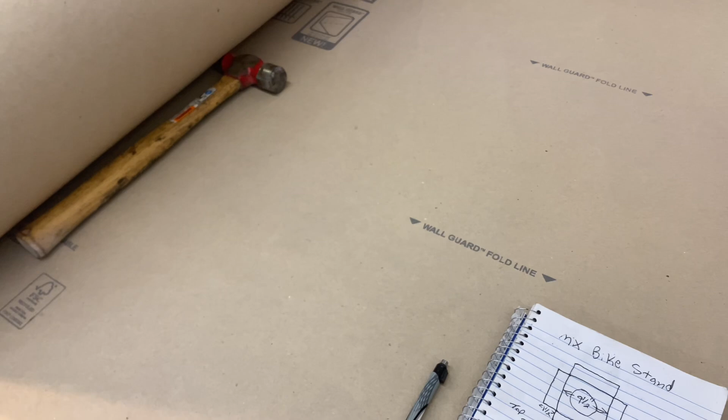All right, let's get started on this thing. First off, I like to make patterns of everything that I make. The pattern board I use, I get it at Lowe's, big box stores. It's some kind of underlayment, something used for walls. But it's like the perfect thickness to use for patterns for everything that I make here.

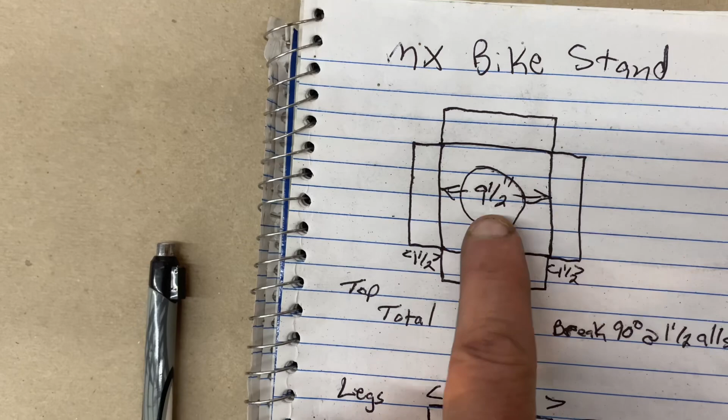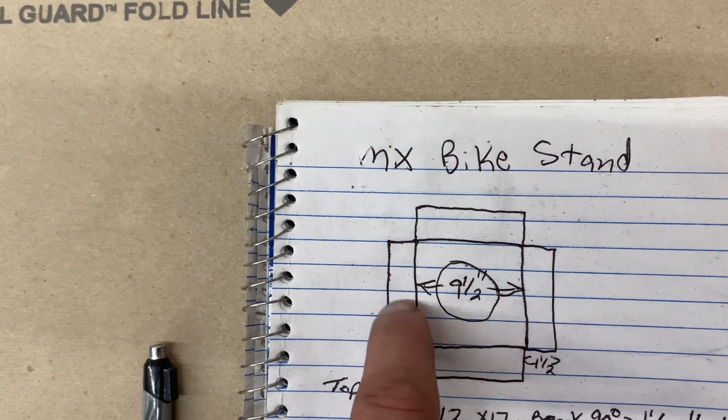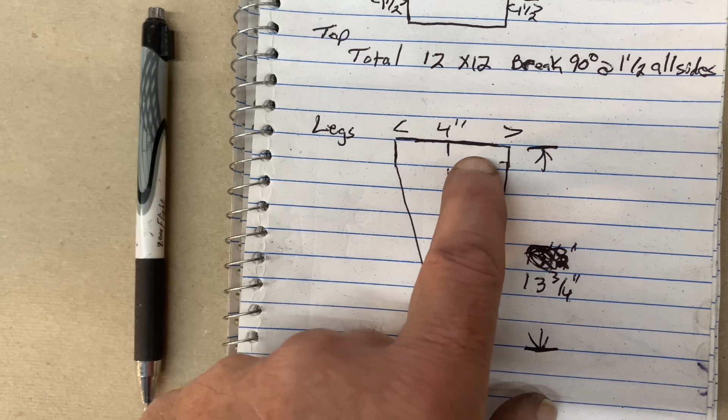So first off, here's what I'm going to have. This is going to be the top of my stand. It's going to be a total of 12 inches square, but I'm going to add 1.5 inches on all four sides right here, and I'm going to break them down 90 degrees. Then what I'll do is these will be the legs. I'll make 4 of those. It'll have a bend in the middle, a break in the middle. And those are right in here is what's going to weld to these right here out at an angle.

So let's get a pattern made for this and see what we can do with it. I also wanted to add, the reason I make patterns for everything is, number one, if you mess up a paper pattern, you can always throw it away. You don't have to throw away any good aluminum, so you can just start over the paper pattern. Number two, if I make a second one, I'll have the patterns there. I won't even need to break out my tape measure or anything. So that's why I use the paper patterns all the time for everything.

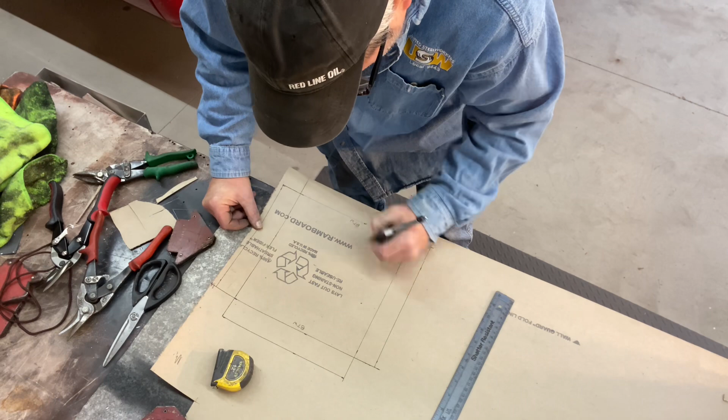Okay, there's our pattern drawn out. So I'll go ahead and cut it all out, and then I will break these 90 degrees. You'll notice I put BTW right here, that's just my code of me knowing what to do. That means break this way. Okay, all of them needs to be broke this way.

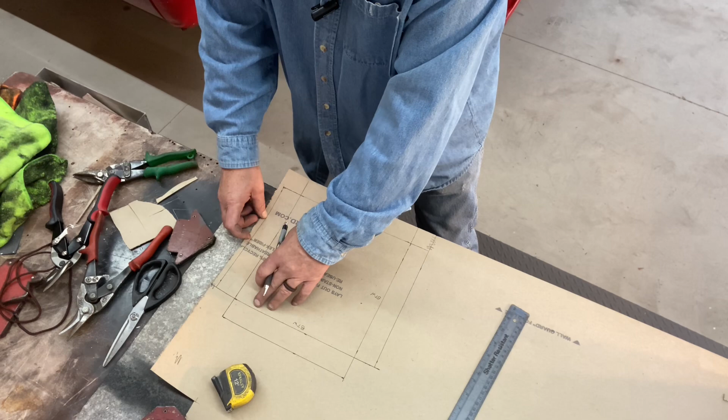Now there are some instances where I'll have a pattern where when I lay it out, I'll have one that's break this way, and I'll have another that maybe breaks the other way. So on those, I will put BOW, break other way. That's just a code for me to know what I need to do. People use different ways of doing it, but I'm going to get this cut out now and put it in the sheet metal brake and get these broke up and go from there.

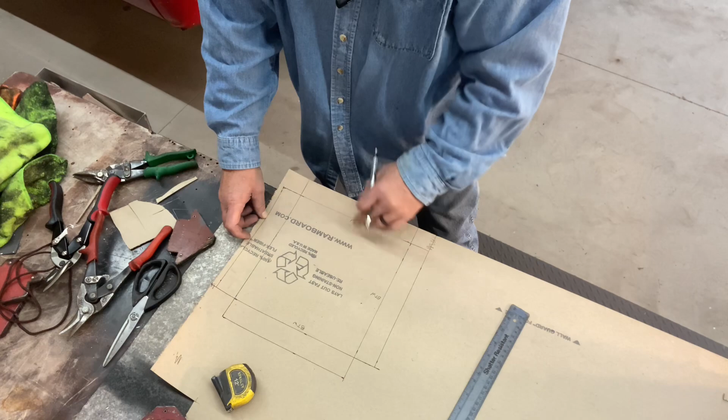All right, we're going to go ahead and make our pattern for the legs, which I'll only have to make one pattern, and that's it, because it'll be used for all 4 legs, so it'll be good. So let's go ahead and draw that one out.

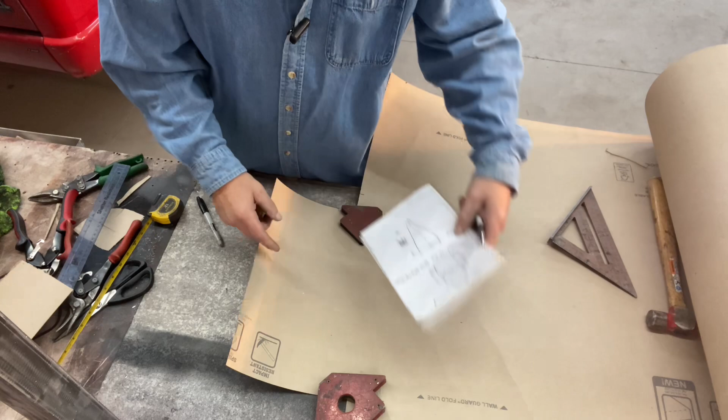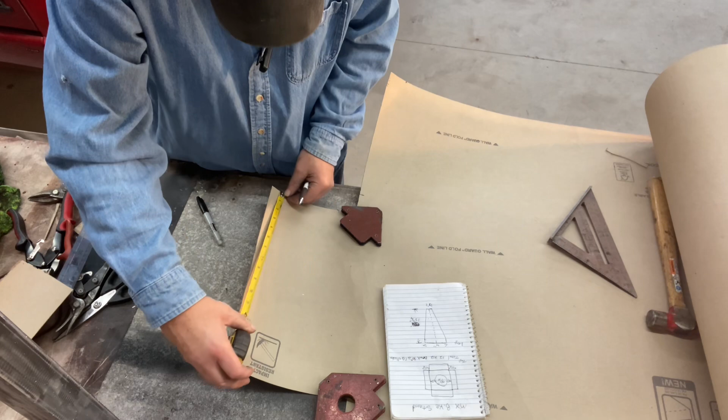Let's see, I was going to make them 4 inches at the top. It'll have a break in the middle at 2 inches, and then the bottom will be tapered. It'll be 3 inches, so these will taper down to it. So we're 13 3/4 total. I'm going to go ahead and mark 13 3/4 and strike a line. Let's make a line all the way across on that. There we go, so we'll just measure over 4 inches. Actually, I'm going to make a mark at 2 inches also.

Okay, then what I'll do, I've already squared this line up. I'll make a mark at 2 inches right there. Okay, and since this is going to be narrow, this is 4 inches. Okay, this is going to be 3 inches at the bottom. That's why I made my 2 inch mark at the bottom also, because I'll need to come out half of 3 inches from my 2 inch line. So 1.5 inches plus 1.5 inches would be 3. So we'll come out 1.5 inches here, and 1.5 inches on the other side.

Now what I'll do is I'll strike a line from my 4 inch mark to this mark, and then from my corner right here to this mark. And that's where I cut it out. My 2 inch line here will be the one that I will have my break, where I will break it. So let me get those marked out, cut out, and then we'll have both our patterns made.

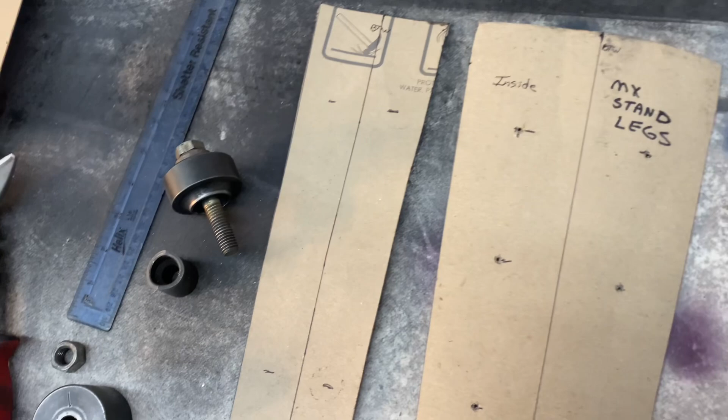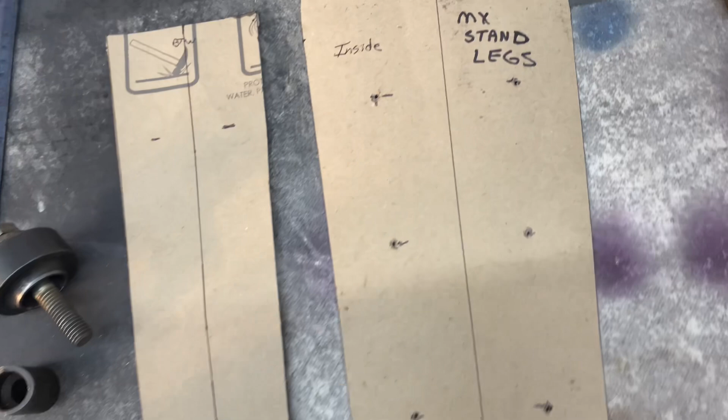All right, I had to change something up a little bit on the legs. As you can see, here's my original that I made right here. I had to make it wider. I'll tell you why, I'm gonna put some 1-inch flared holes right in here, and the tool that I have to do that is right here.

I can't put these holes in until after I put the 90-degree brake in it, so I wouldn't be able to get it in my sheet metal brake. If I use this on here, you can see this was going to hit my brake, so I had to make all of it wider.

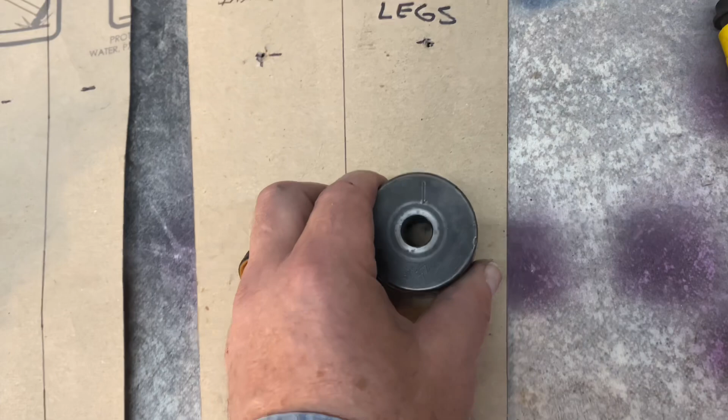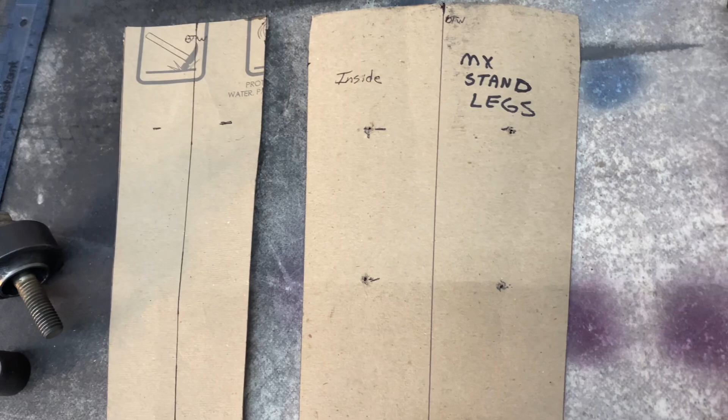So now after I get it broken to 90, I'll be able to put this on there and put all my holes in it. That's why I had to change that up, but that's why I mentioned using everything as a paper pattern instead of cutting something out of aluminum and realizing it's not going to work. All it wasted was paper.

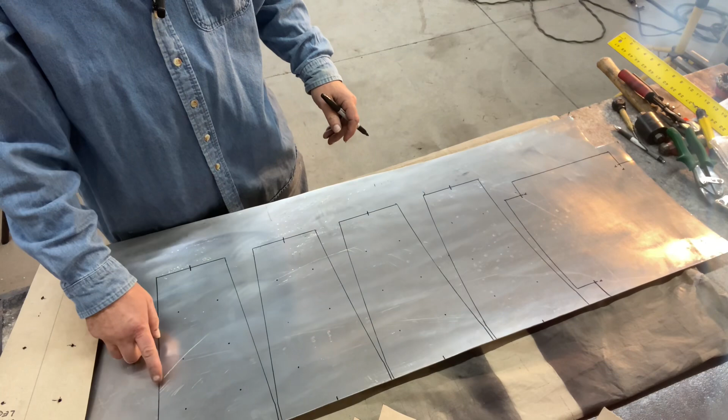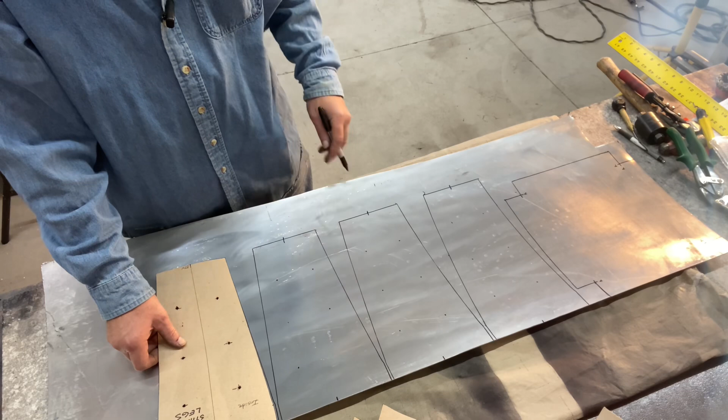Now I know to get the right measurement, I'll need to cut on the inside of my black line here. If I cut on the outside, it'd be just a little bit bigger, the thickness of the Sharpie, but it still wouldn't be the end of the world, it'd still be just fine. So I try to concentrate on the inside of the black Sharpie there.

And we'll cut everything out, put it in the sheet metal brake, and then we can start putting our holes in it.

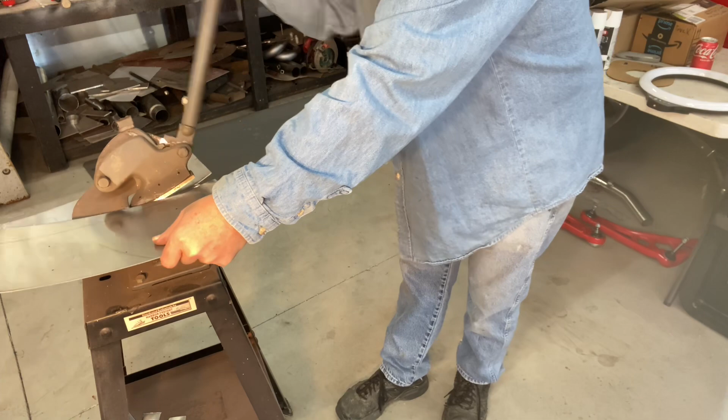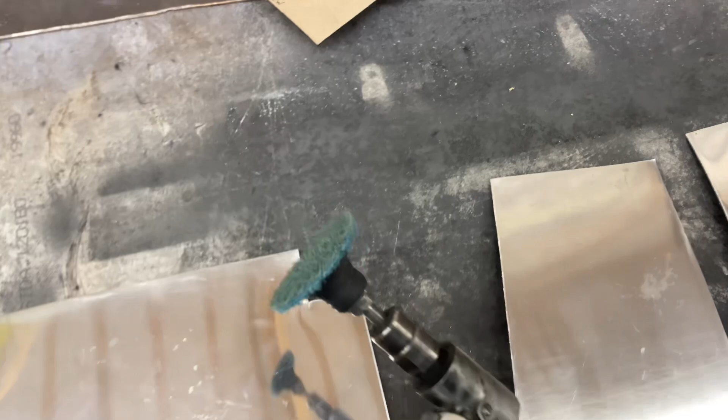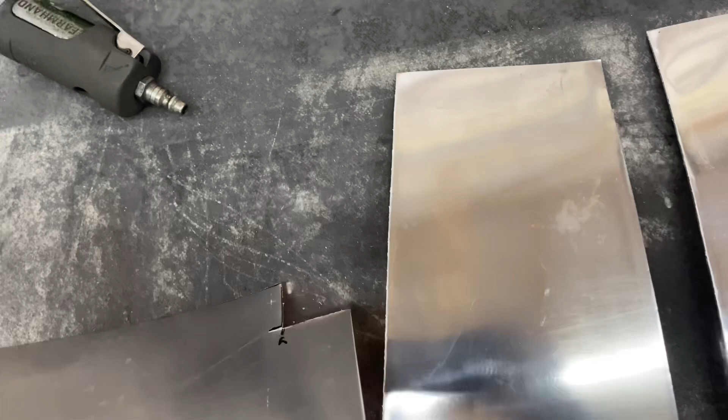All right, as you see, I got all the pieces cut out. Now what I'm going to do next is take my handy dandy 90-degree grinder with my Roloc Scotch-Brite disc on it, and I'm going to clean all the edges up, around the corners a little bit, make sure there's nothing sharp, and then I'll go ahead and throw them in the sheet metal brake.

What I'll do here first is clean all these up right here with the Scotch-Brite pad. I'm going to go ahead and drill my holes right here for my hole punch, and I'll go ahead and get that done too.

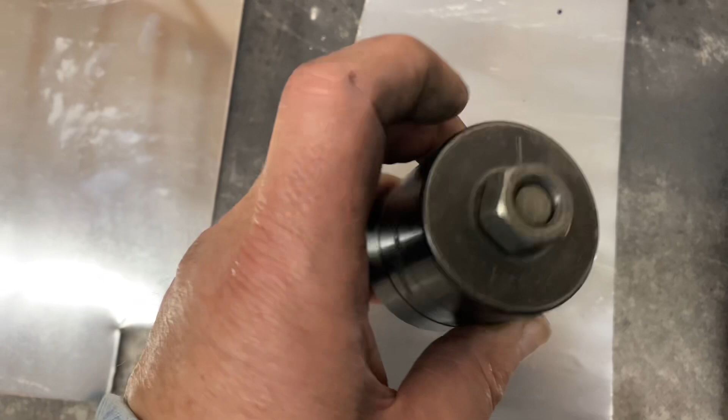These are required to have 1/2-inch holes. That's what this hole punch is, it's a 1/2-inch bolt, so I've got to have 1/2-inch holes to put the hole punch in it. Anyway, let's get all these cleaned up.

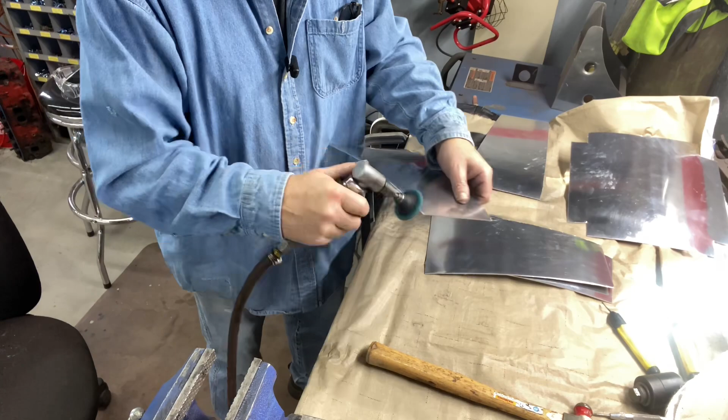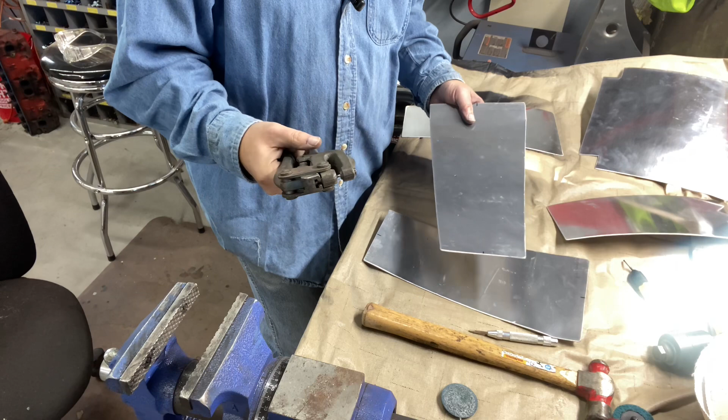Got this little hole punch here. It keeps me from having to drill an 1/8-inch pilot hole. I have an 1/8 inch in this right here. Pretty handy to have, you can punch leather with it or whatever. I use it on aluminum sheet metal.

All right, so I'll drill all these little holes out that I punched. I'll drill them out to 1/2 inch and clean up the holes, and then I'll be ready to put this in the sheet metal brake, all of these, and then I'll be ready to flare the holes in them. Cut and flare those. Actually, it's the flaring tool that will cut the 1-inch hole and flare it all at the same time.

Something funny happened a minute ago. I went inside and was playing with my dogs, and my wireless mic here hit the floor. One of my dogs grabbed it and took off out the doggy door out back. You should have seen me running after him. I didn't think I was ever going to get it back, but it's a little dirty, but it's okay.

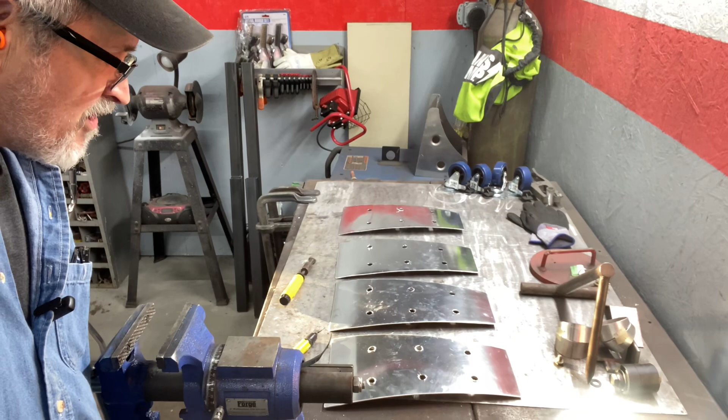Anyway, I got all 24 of these holes drilled. So now I'm going to clean all the holes up and get ready to put these things in the sheet metal brake, like I said, get them broke up, and we'll get some holes flared in them, once again like I said, and go from there.

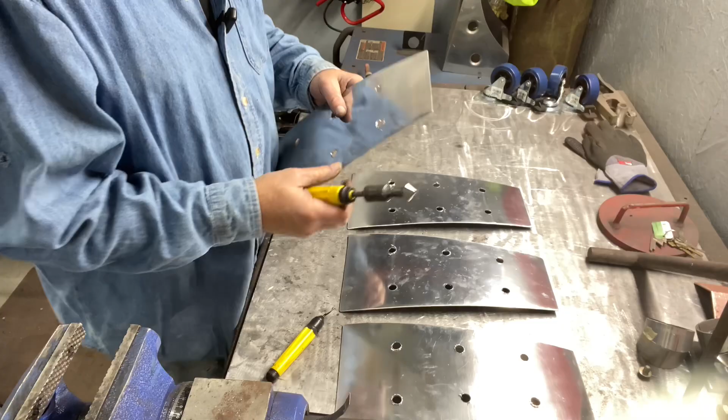Little NASCAR days fabrication tool right there. Little deburr tool.

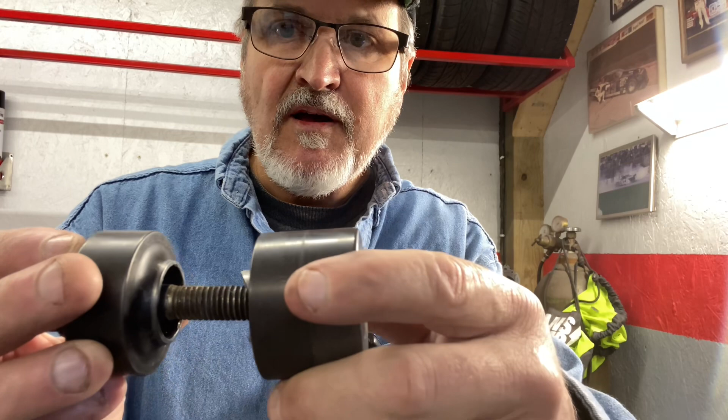I'm getting ready to punch these holes to 1 inch with a flare. I have this 1 inch punch right here and this flaring tool right here. I will sandwich my work in between here and just basically squeeze it together.

And what I need to pay attention to whenever I'm using these is I need to know which way I want the flare to go. Do I want it to go in? Do I want it to go out?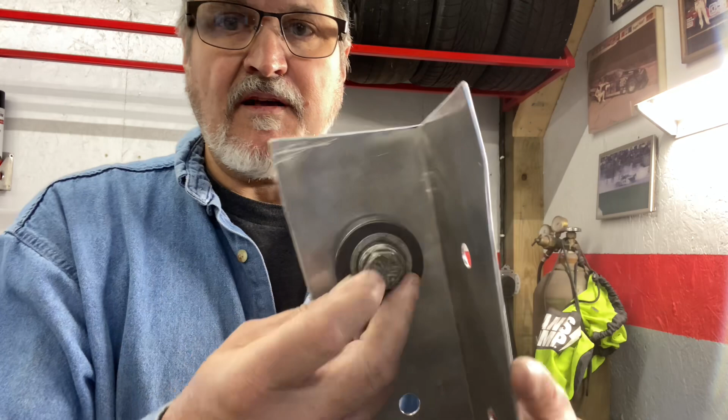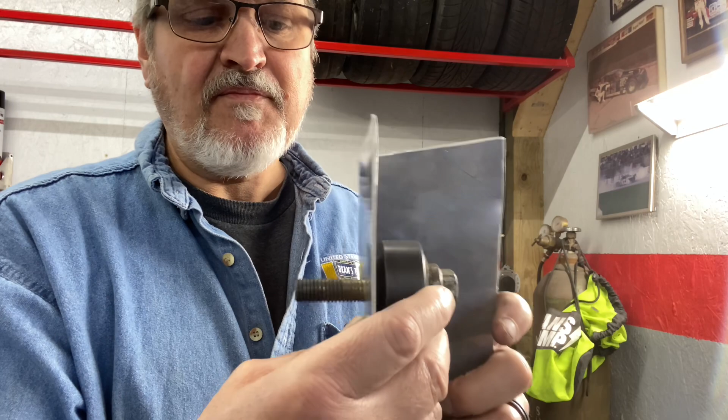In this case here, this is the outside, and I want it to flare out. So I'm going to take this flare and put it on the inside like that, and put the other one over here. I'll put it in my arbor press and push down on it, and it'll punch that 1 inch hole and also flare it. So let's get to it. All right, we have 24 of these bad boys to do.

I'm gonna put my bolt down through here so it lines up, keeps it lined up and centered up. I want my flare out. That there. And this is 80 thousandths thick, so it's pretty thick. So I gotta use a little cheater bar with my press.

I do have a 1 inch Rotabroach hole saw that I could have just drilled them all out to 1 inch, then I could have punched them. But at the time, I did not think of how thick I was dealing with here. So let's do this here.

Pretty thick stuff. There we go. Now we'll push on down to flare it. That's how we do it. Now, there's our flared hole out.

Then I'll go in here later and clean all this up right here to deburr it. It's all sharp right now, so we'll clean all that up.

Always got to remember, my piece sticks in here, can't forget to get those out. Just let it fall out, you know. Yeah, there's my 1 inch hole. All right, 23 more to go.

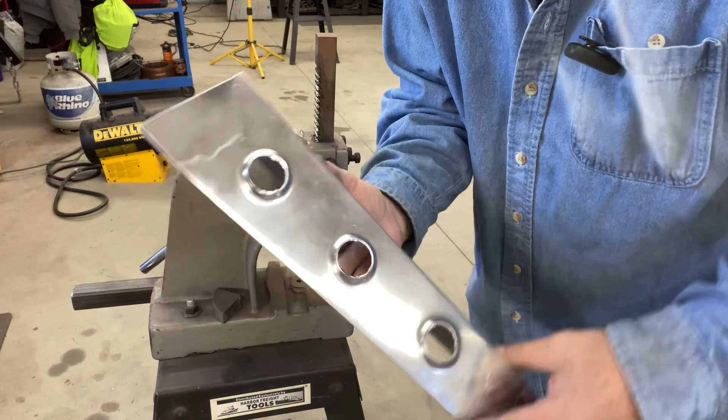Okay, you get the idea, that's what it'll look like when it's done. After I clean them all up, it'll be nice, ready to go. So let me finish the rest of these up, and we'll get ready to figure out where we're going to tack these on at. Then I'll have to make a tray in the middle of it all. So you'll see that in a little bit.

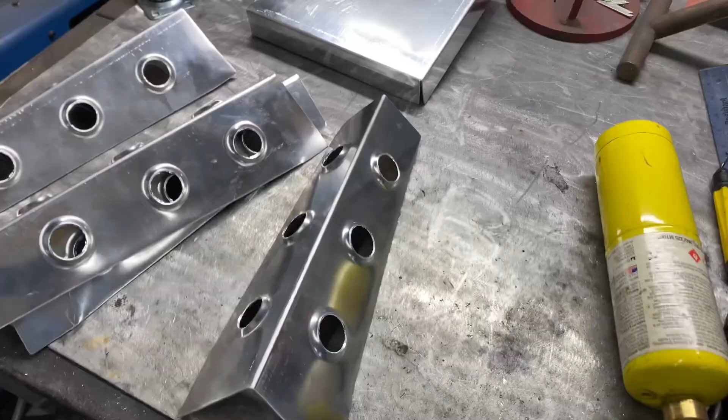Well, I ended up taking my old torch here and heated all these up just a little bit, enough where I could still grab onto them and hold them. And I tell you what, it made punching those holes a whole lot quicker. Broke up some of those chemicals in that aluminum there. A little bit chilly here in Kentucky.

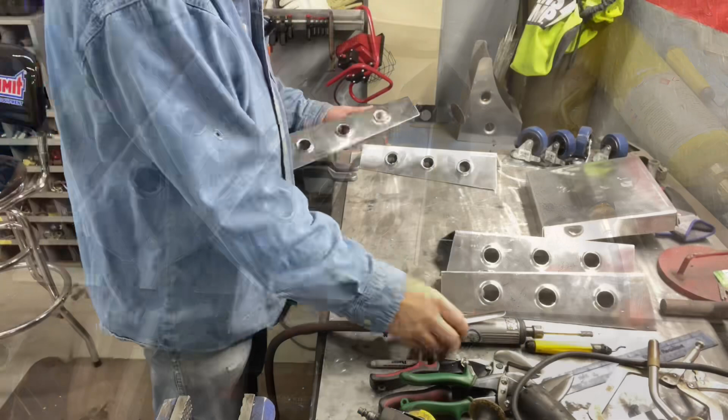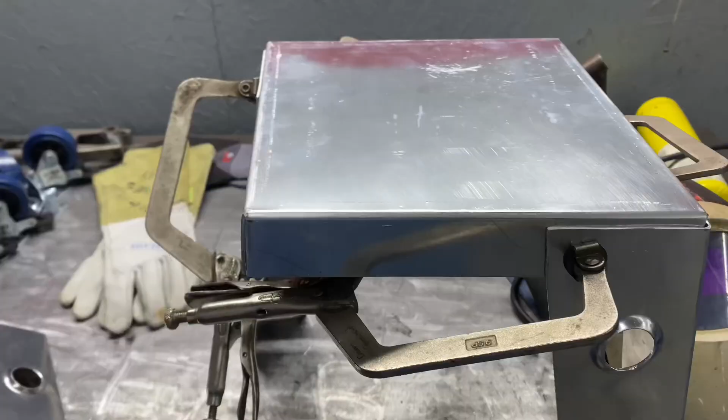All right, it's time to do some welding. Time to tack these on. I've got 2 of the legs clamped on, and the base is going to be wider than the top.

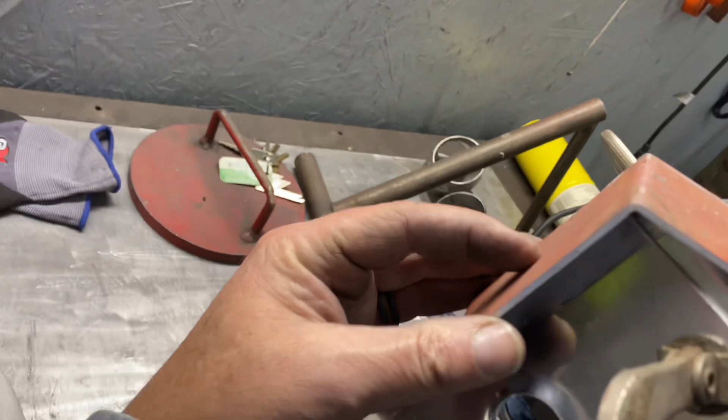So what I did, I took a little piece of aluminum and broke it in my brake to get the angle that I wanted. I'll get one of them like that, and whenever I do the rest of them, I will set this on there and get it all close.

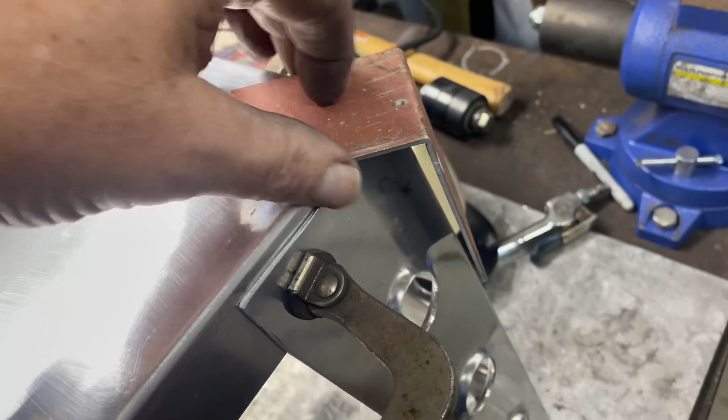Now, I left the legs a little bit long because this is 14 inches tall. I'm gonna make it about 13 inches. So I'll have to cut these off and square everything up. Be the last thing I do.

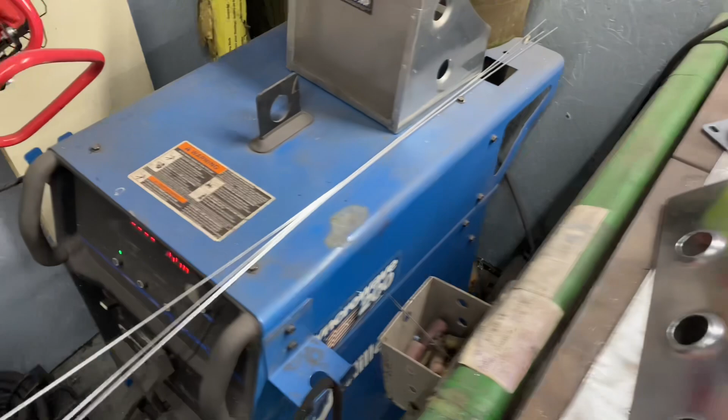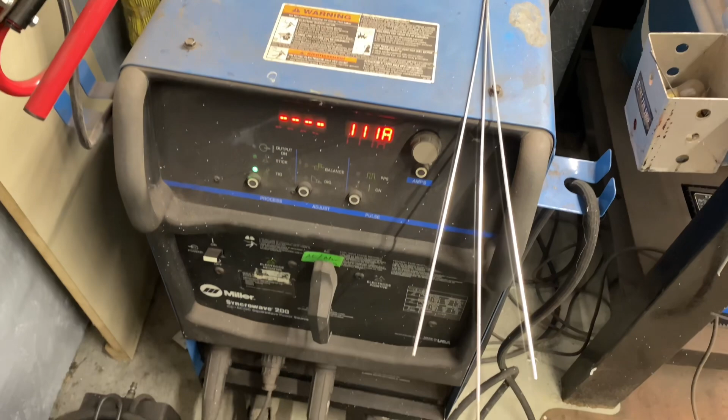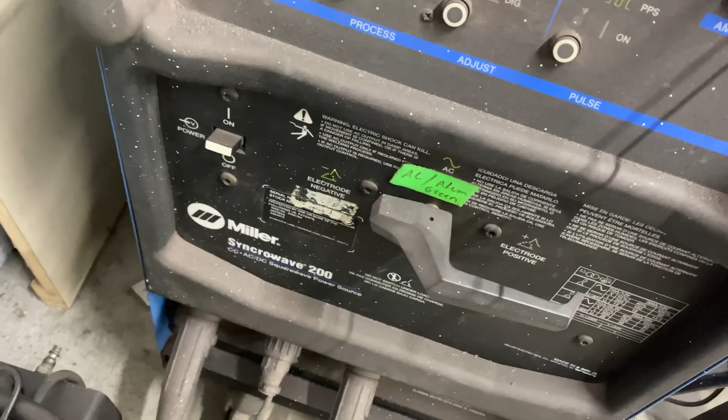So, all right, what I've got here, I'm gonna weld with, I've got a Miller 200 TIG arc welder combo, I think it is. It's more for the hobbyist, not industrial type or nothing, but it's perfect for what I need. Okay, we're welding aluminum. We've got it set on AC for aluminum. Of course, DC would be for steel. So we have it on aluminum, AC.

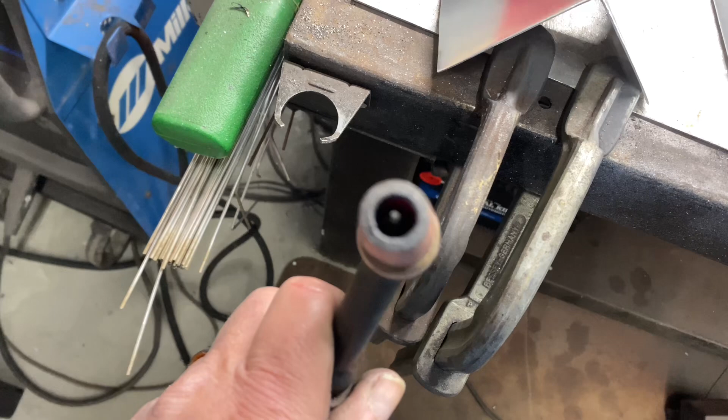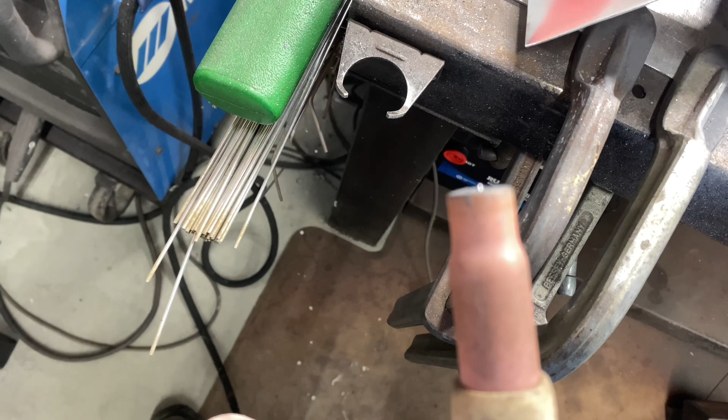I will be using a 3/32 tungsten. I use a green tungsten for aluminum, and a red tungsten for steel. I'll be using a green tungsten. I've got it sharpened to a point, but it will ball up for aluminum, and you don't have to have it sticking out of the cup for aluminum. Now, steel, you want that nice and sharp and sticking out just a little bit, but for aluminum it'll ball up on the end. I'm going to use 3/32 rod.

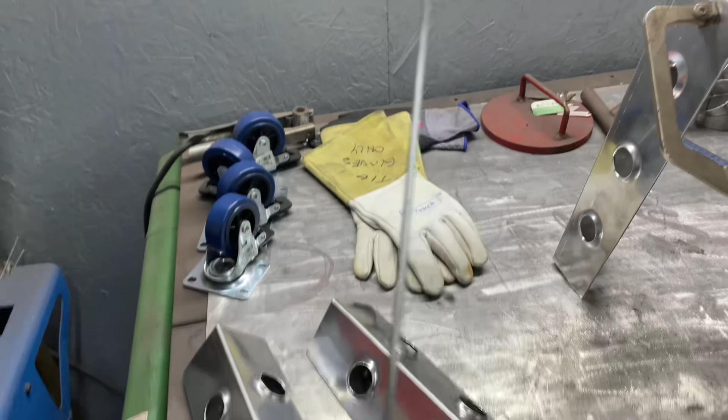So we're going to get these tacked on, get it all squared up. Try to finish this thing up today.

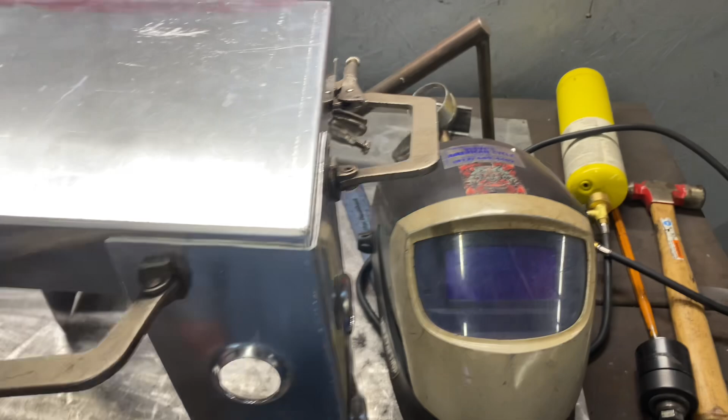Since it's just a little bit chilly today, it's not too bad in the shop now, but I'm going to go ahead and take the torch and heat everything up just a little bit. You don't have to, but it does help some. Heating it up a little bit will help it weld a little bit quicker and a little bit easier for you.

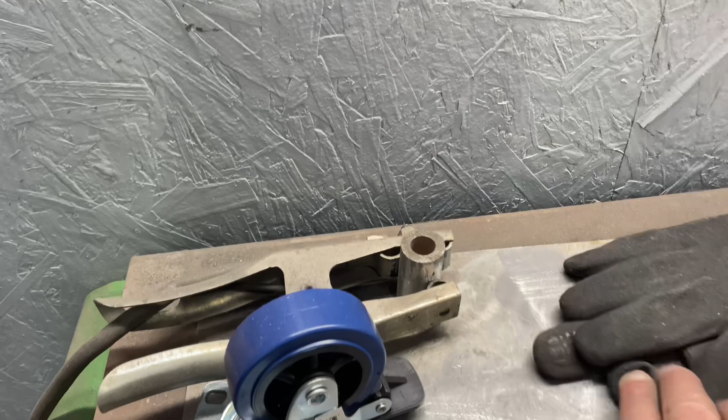A lot of you may see that I do not have a ground hooked up to it. You're like, okay, where's the ground? How's he doing that? Like I've said in the past, I've got a piece of aluminum welded to some aluminum sheet right here, and that's where I put my ground. That way I don't have to have it on my work. Sometimes it'll tip my work over, or it's hard to find a place to ground, so that's how I do it. As long as this is touching good aluminum down here, we're good to go.

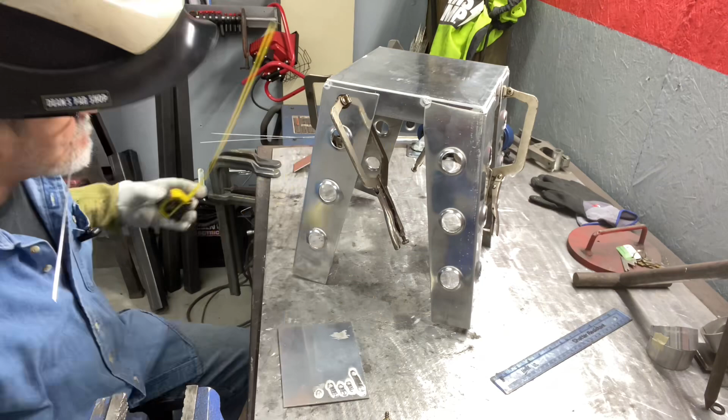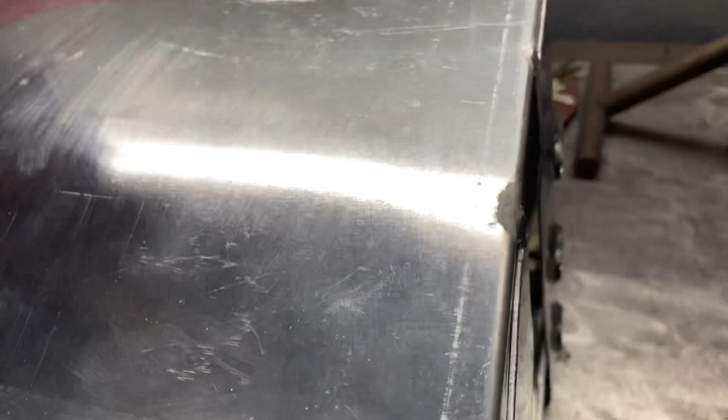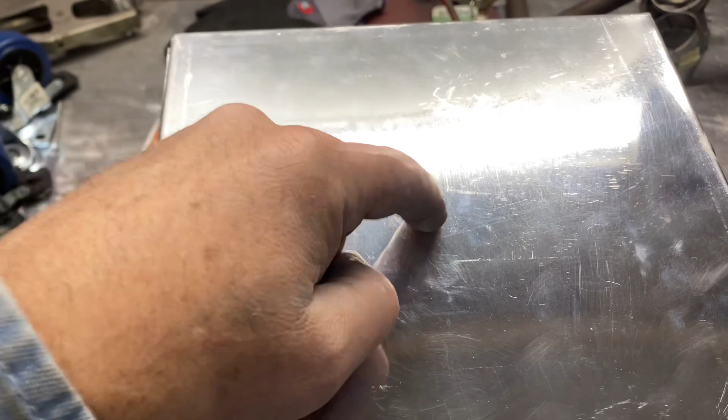I went ahead and made a tray, a support tray, plus something to hold tools on. I've got that all centered up. I'm going to get ready to tack it in and start welding this whole thing up. Then whenever I'm done, I'm going to put about a 3-inch hole right in here. I do not have a 3-inch hole saw, so I'm going to mark it out and probably cut it with an air saw. That way, when they put their bike on there, they've got that hole, I guess to change the oil in them, so they can drain the oil out maybe. Okay, but anyway, let's get this all welded up now.

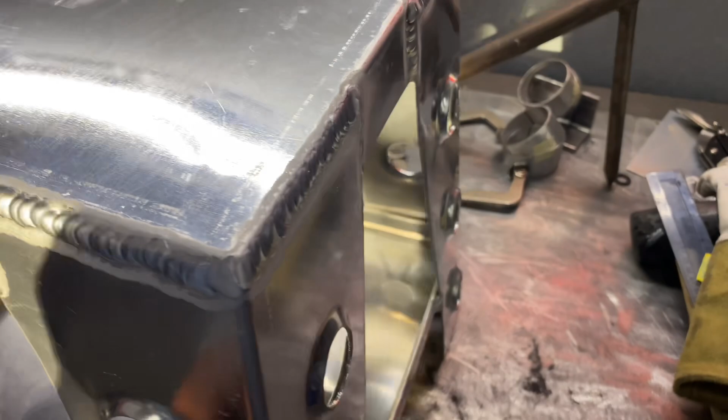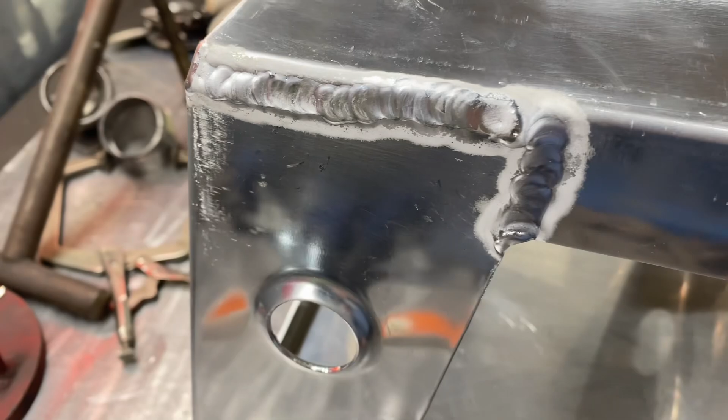All right, it's all welded up now. And I told you I was not the best welder. I know that, but you know what, it's not totally hideous looking, and it'll hold. That's all that matters, right? Like I said before, I'd like to see y'all's welds, where you got the old stack of dimes going on your aluminum tigging, but I'm happy with it. It's not going anywhere. So put that hole in the top of it.

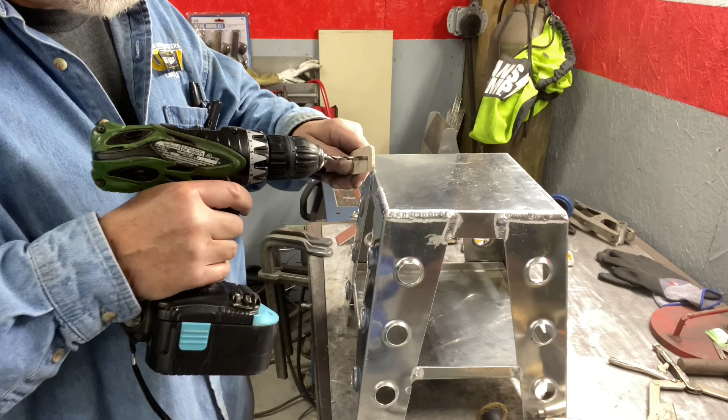All right, I've decided I'm going to put a 4-inch hole in this. And like I say, I don't have a 4-inch hole saw, so what I'm going to do is drill a hole in a piece of paint stick. I'm going to mark out half of 4, of course, which is 2, and make a mark right here on my paint stick, and drill a hole right there.

All right, so then what I'll do is measure the center of the top of this. Got the center. So what I'll do here is make a punch mark right in the center, and I'll take my paint stick, stick my punch in here like that and just hold it down, and I'll take my Sharpie and make a circle. There we go. Now I've got a perfect 4-inch circle right in the middle.

I'll probably drill a 1/2-inch hole right here, something to start my air saw in, and I'll air saw it out and then clean it all up. Well, that'll do it for this one. I had a lot of fun making the MX stand. Just got to add some plastic to the top of it and pop rivet it on, and it should be good to go.